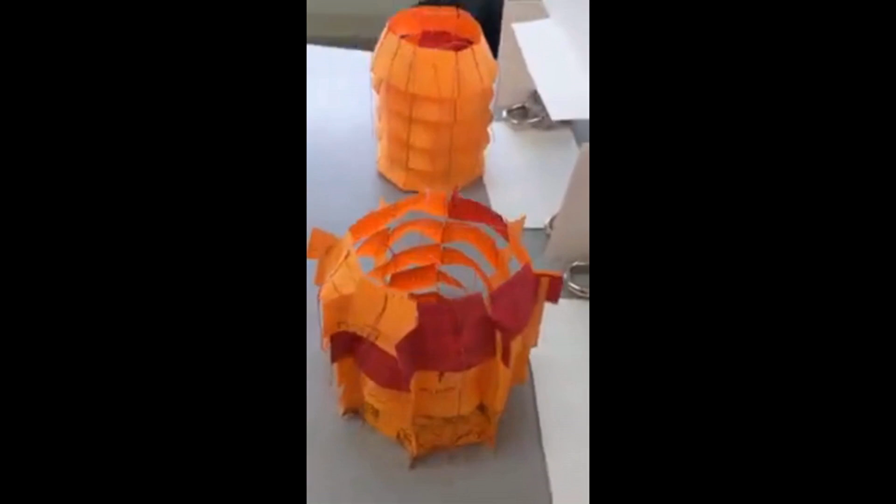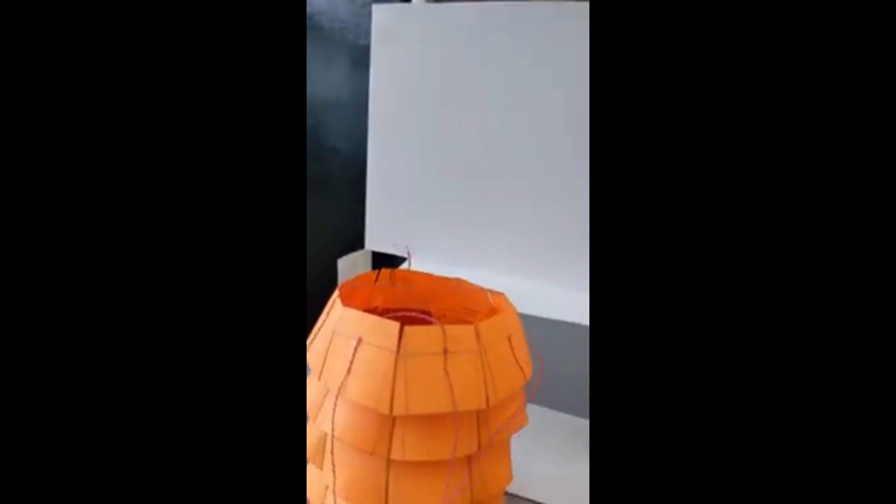Now, I don't know if you remember this, it was the Darwin wind turbine, and I made that out of wood with flapped vents, and to be honest, it rattled worse than a skeleton in a hurricane on the Day of the Dead. You weren't going to get much sleep with that thing banging around on your roof. A friend of mine, Max Kennedy, thought exactly the same thing, and he had a look at it thinking, can we do a flapless version? And he made some models in paper. With those paper models, he was able to show that this thing actually worked, blowing the air up through the central vent and not disturbing the string at the back with the wind flow going over it. And that was really awesome.

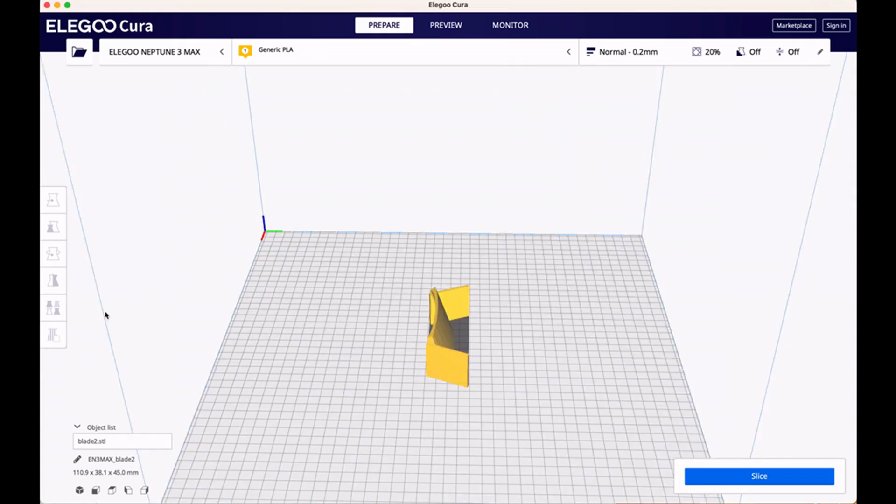I've gone through Tinkercad, so I jumped over to Tinkercad and designed an STL file to test the blade, and this is the design of the blade. Now what we're doing is we're printing it, printing out individual blades. They're 5 centimeters by 2 centimeters, so we can see the idea actually works by putting it together. Once we do that, we can put them together in the actual program to create a rack of them, and see if we've got a nice rack or not. But anyway, let's get them printed.

So there's my tiny example printed, and if I put 8 of them together, then I can check the angle of them, and yep, they make a complete enclosure. Now it's an octagon, so that internal angle is 135 degrees.

Now, Max tells me that if it has baffles on the outside, the support structure on the outside, it operates better. He did both, and if you watch the video, you'll see the result of that. So he did both, and I've put the baffles on the outside, so the wind hits the baffle, and then it's forced up. Obviously, this is what a single ring is like.

To make a multiple ring, what I've also done with these ones is to check that they, in fact, slot on top of each other, because that would be annoying. And they do slot rather nicely on top of each other to make a stack. So having checked that, we now can have a bit more confidence that we can put these together in a rack and print a rack out.

To see how I made that, we're in Tinkercad, we've got the work plane, and I always put the ruler on, because if you put the ruler on, you can tell where you are and what you're doing. Stick it on, use midpoint, there we go.

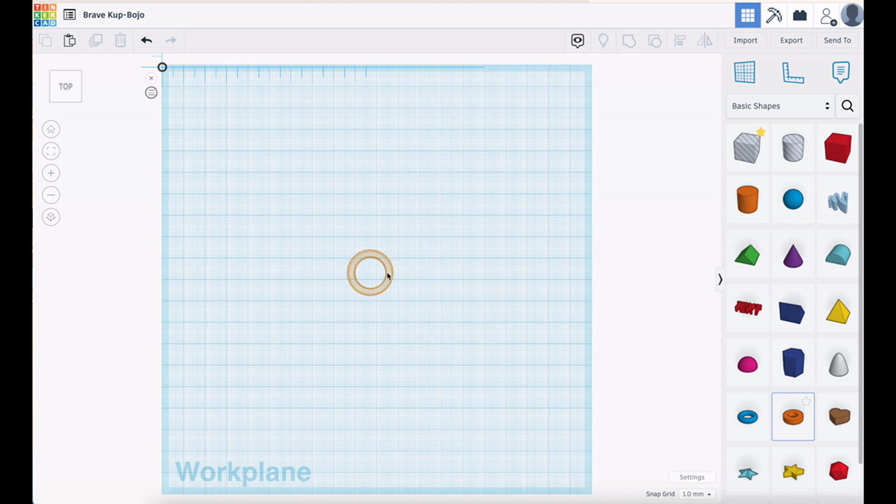Now this is a whole group of primitives you get. You get other ones if you click down on basic shapes, so these primitives are all I actually used. Start with the tube, put the tube somewhere on there. If you've got the ruler on, all of this stuff will show up, which is brilliant because it means that we can change sizes simply by clicking on there and typing in our new size. We can move it with the arrows like that, or we can move it just by clicking on there and typing in the position that we want it to be. There we go, it's in the center.

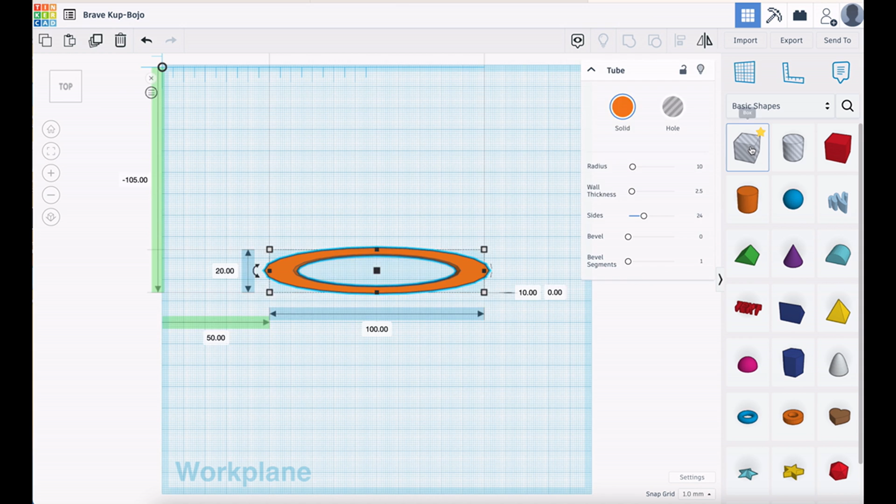Now we want this, which is more or less an erase tool. If we click on that box and add that box, we can drag the handles to change the size, or we can highlight those and change that. And equally we can change the position. Remember, we used midpoint, so if we click on that midpoint, it was -105. We click on that midpoint, it'll be that midpoint there, which is 10 from there. So 105 would be 95. And that puts it in the midpoint of there.

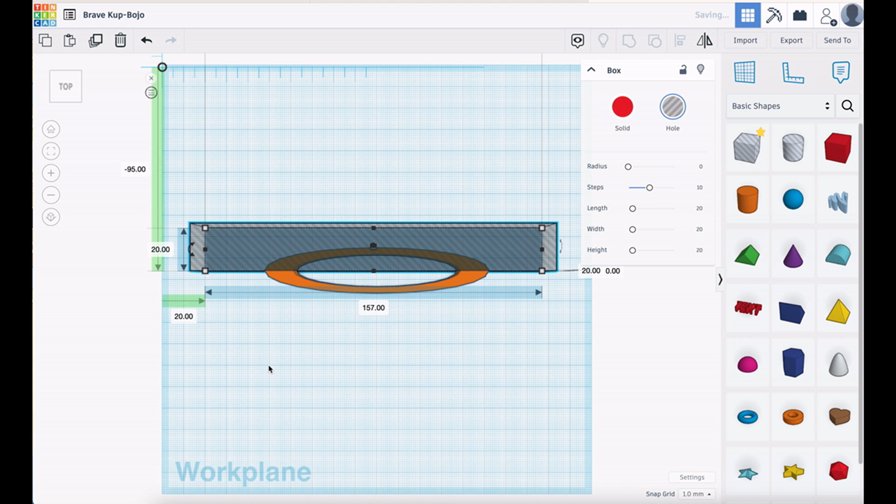Now if we click out there, highlight the whole lot, and group the shapes, we get only that shape left. It's only 10 millimeters high, which is a bit short, so let's make it 60 millimeters high. There we go, we've now got it 60 millimeters high.

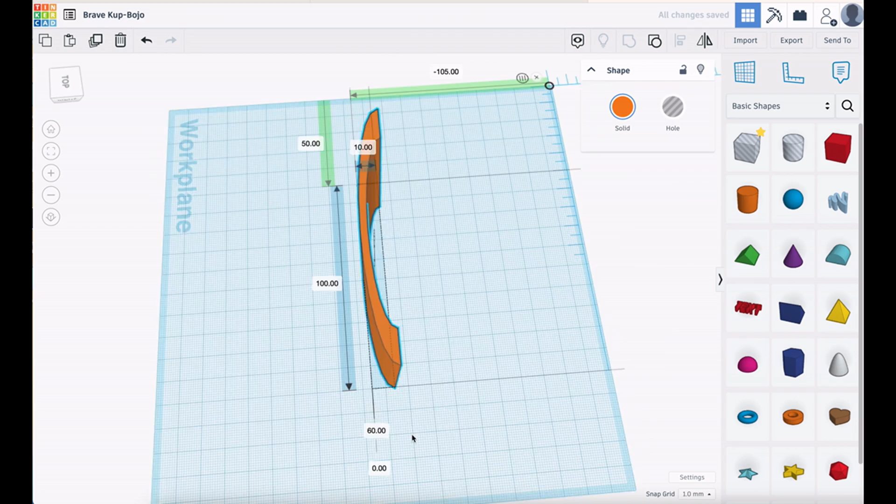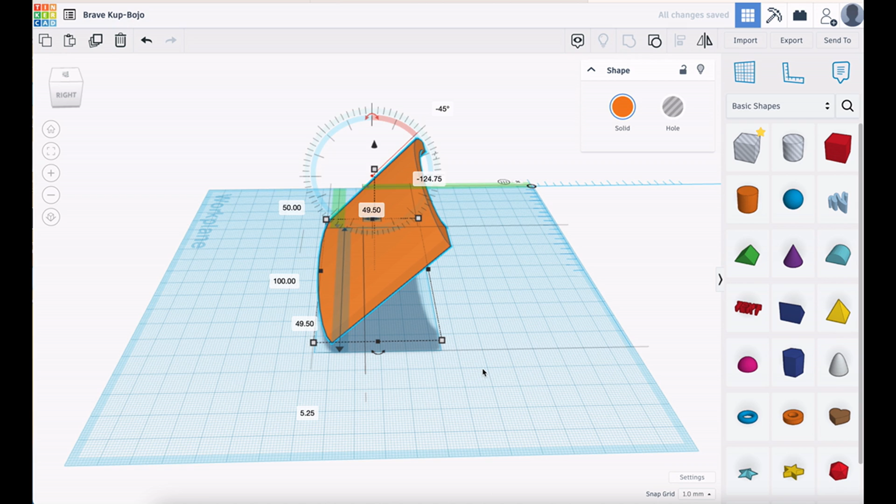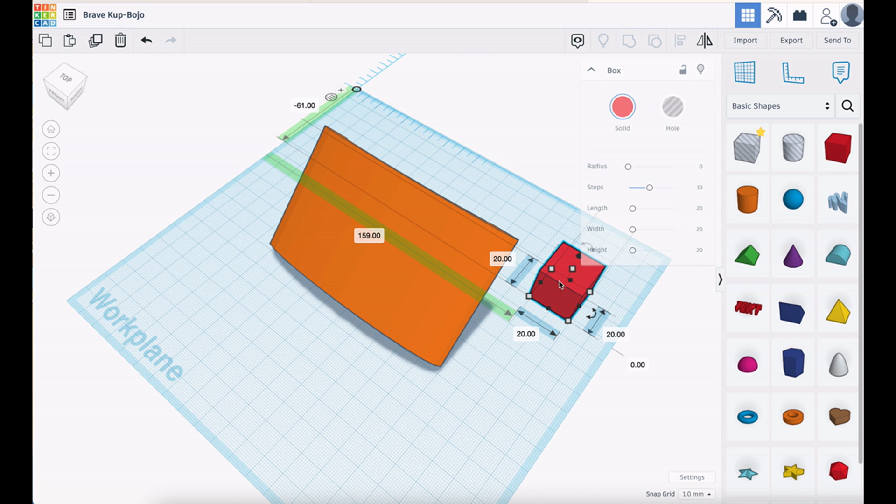Now, of course, we want the side bits to it. And for the side bits, we can use this, put the block on there. If we're wondering how big that is, remember all you actually have to do is that, and it tells you it's 49.5 high. We want to leave a little bit at the top, so let's make this 50. So in its height, which is that one there, we'll make that 50. Its width, we only want about 3 millimeters, and its length here, we want about 40. And that gives us a side pane.

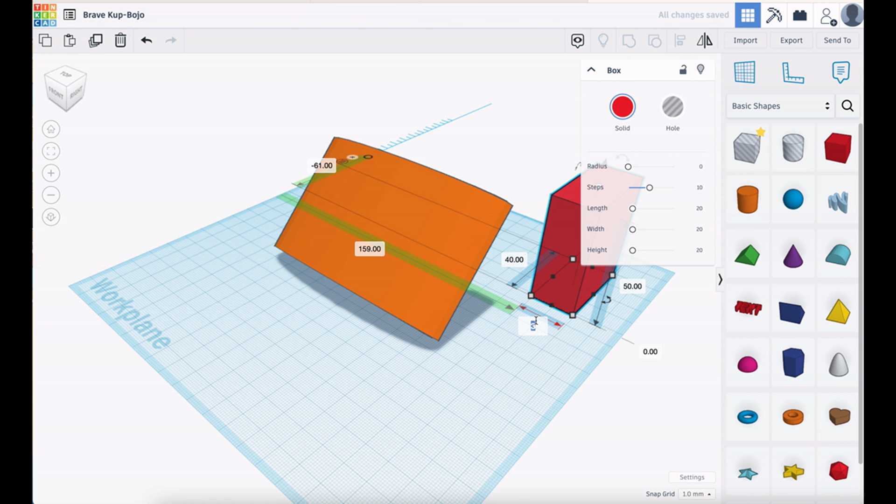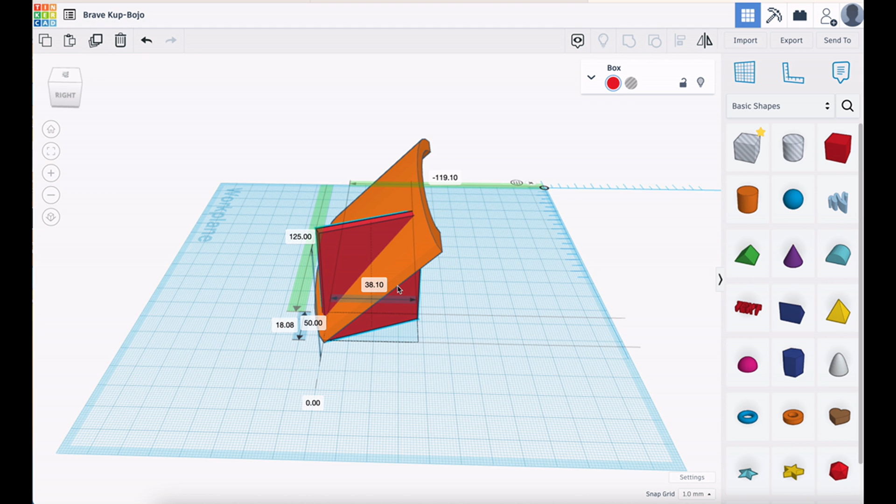If we click on that side pane now, we'll again get the rotate, there it is, and we can rotate that 22.5 degrees that way. That will give us an octagon when it comes time to do the actual octagon. Click on top of the top view.

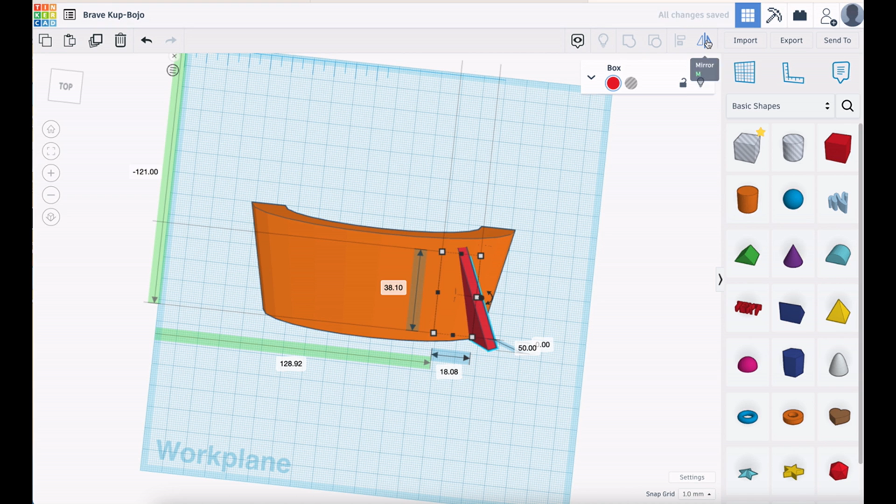That's looking pretty. If we click on that and replicate it by clicking the replicate button, or Control D, it will replicate it. It's the live one. If we click mirror, it'll ask which way we want to mirror it. We want to mirror it that way, and we get a duplicate mirrored at the other side.

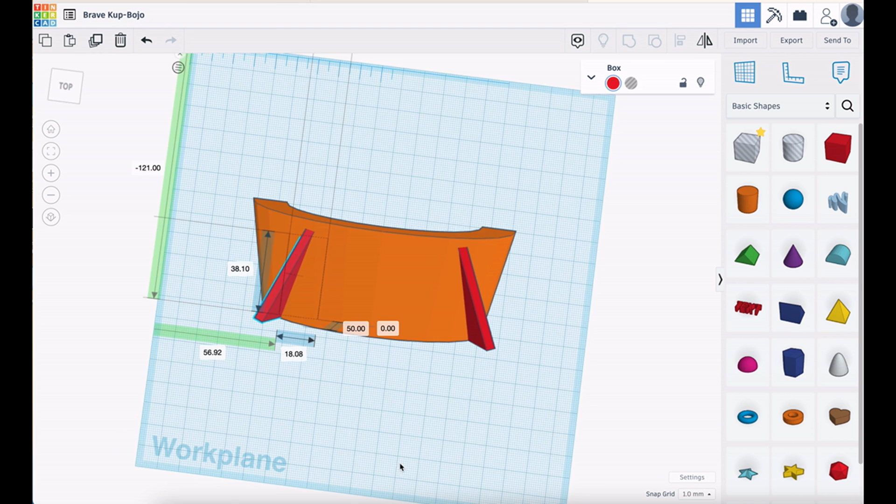At 22.5 degrees, we can slide that along until we get it into that position. We're getting very close to what we actually want. All we need to do now is get rid of some of these bits and pieces, and to get rid of things we use this.

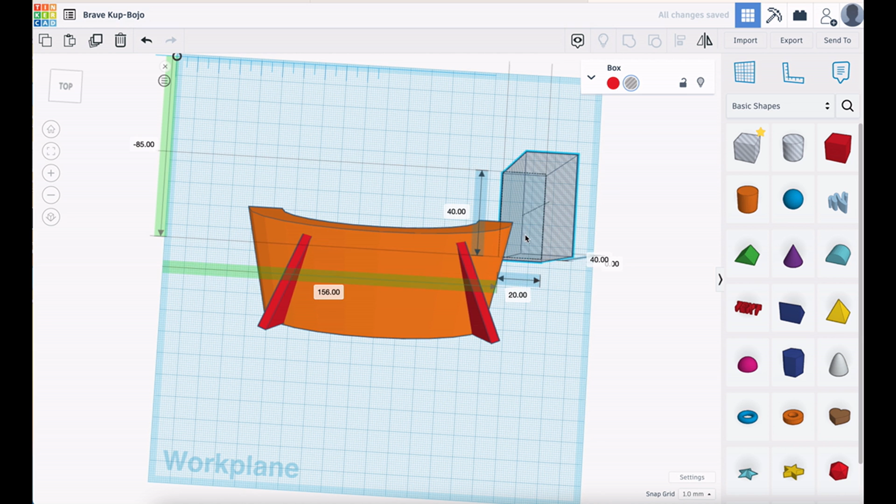So we can stick a box on there, and again we can increase that to 40, which is the one we had before, 40, and then we can increase that to 40. If we move that down, it will cut off this. Of course, we want to angle it again.

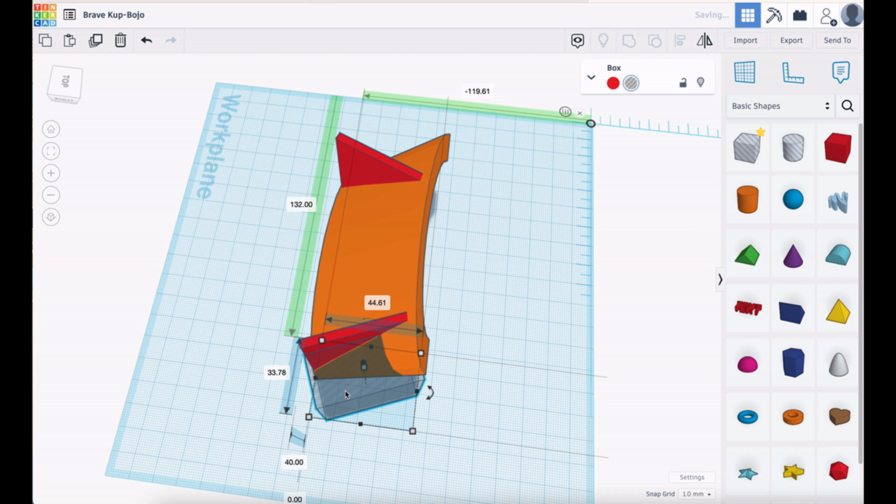We want to angle it the same way that we did that, at 22.5, and then we can move that in there. Check it's in the right position. It's obviously too short, so let's increase that to 50. There we go.

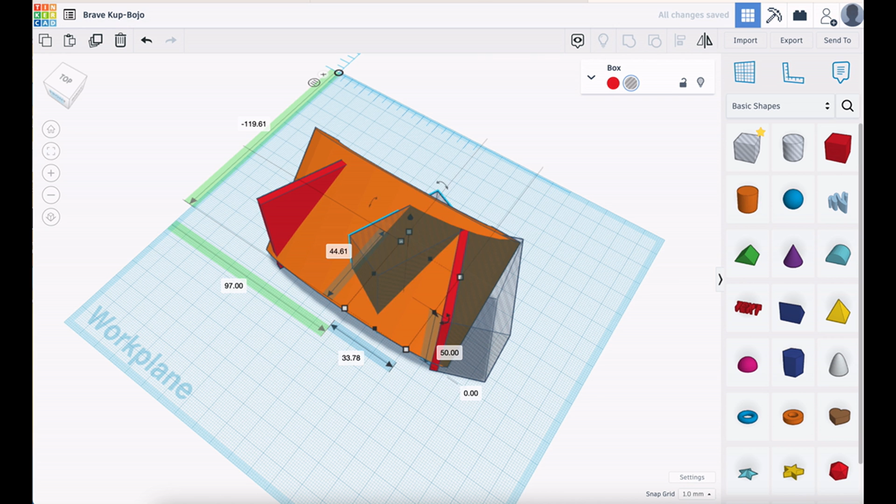Then we can duplicate that and mirror it, and this time again we want to mirror it that way and slide that one over there. Check it's in the right position.

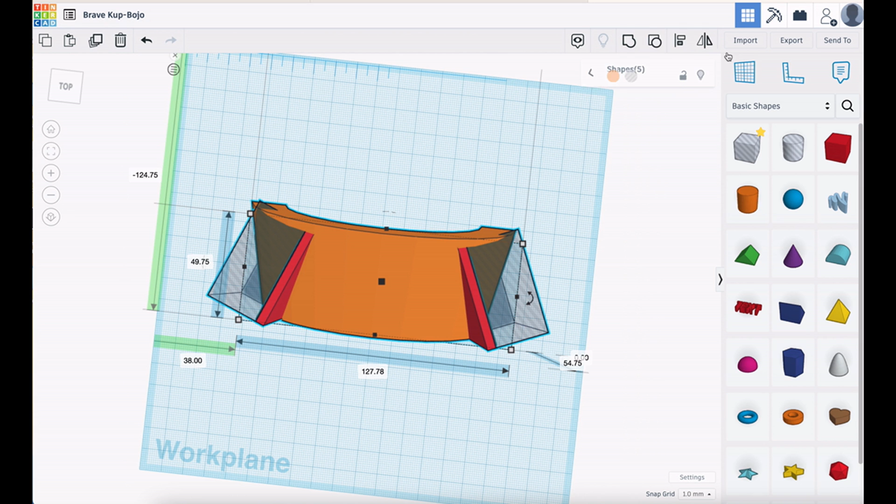Okay, but now we can click off the workspace, highlight it, group it, and it will rid us of all of that. Now we've got these extra little bits that we don't particularly want, so we can get another box.

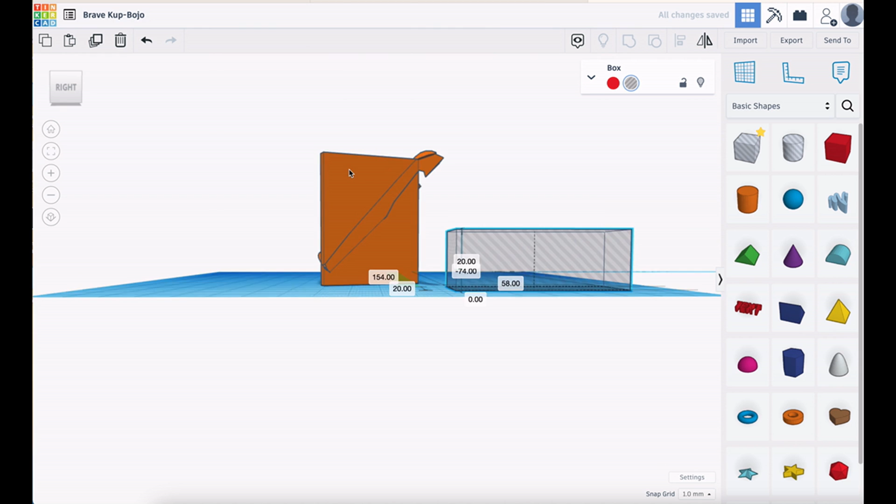We can make it whatever size we want. You'll see, however, it is on the ground floor, so to speak, and we want it to be 50 up because we want it on the top of here. You can see it's saying there it's on the ground floor right there. Let's type 50, and lo and behold it jumps up to the right height we want it at, and then we can drag it over there.

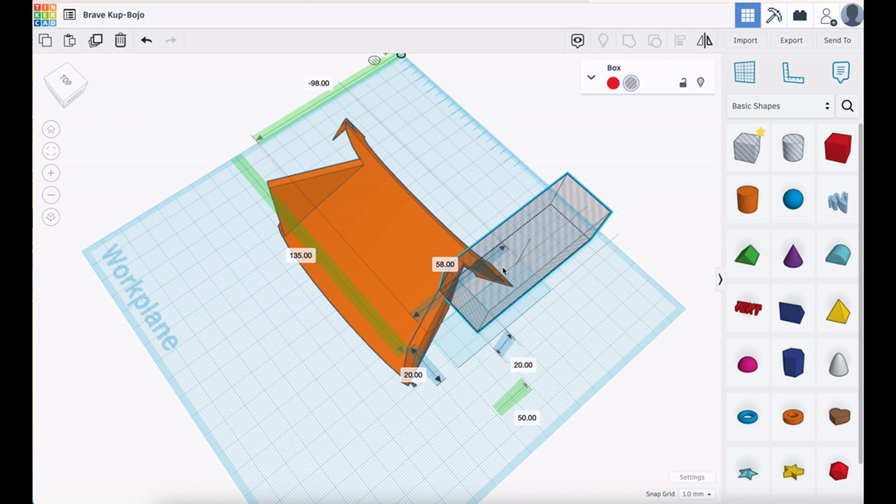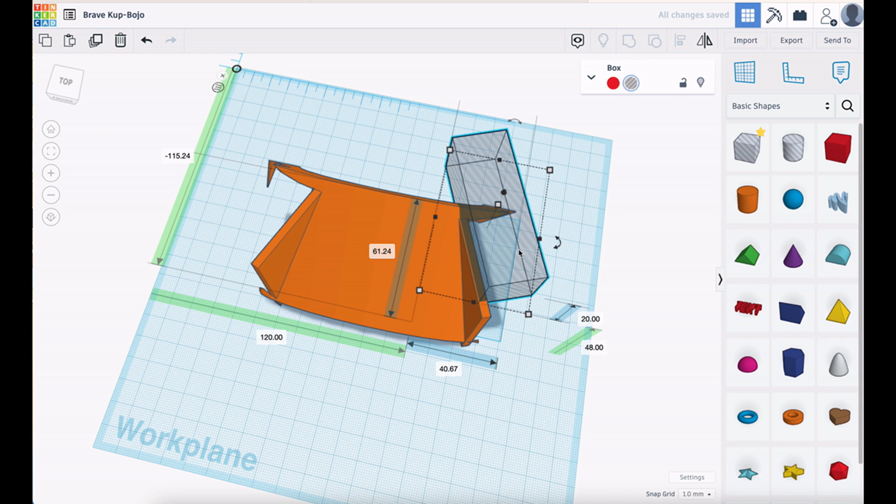Angle it, and move it in position. You can also move it by pressing the arrows. Fantastic.

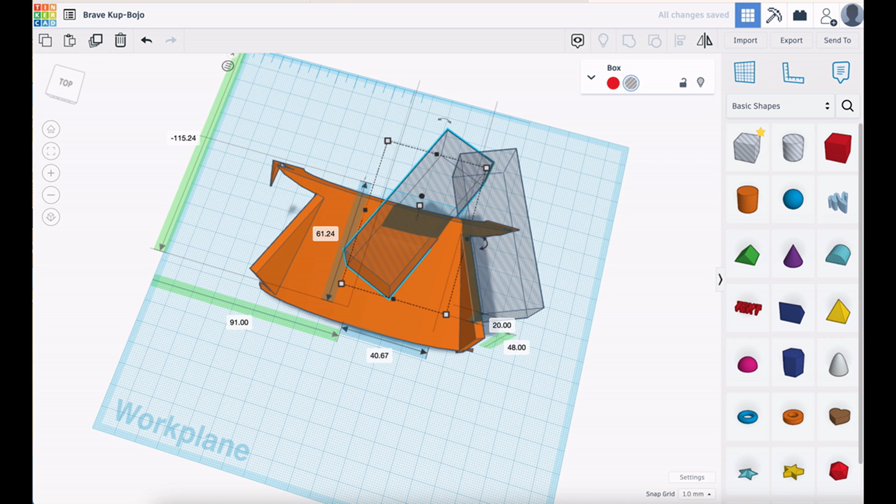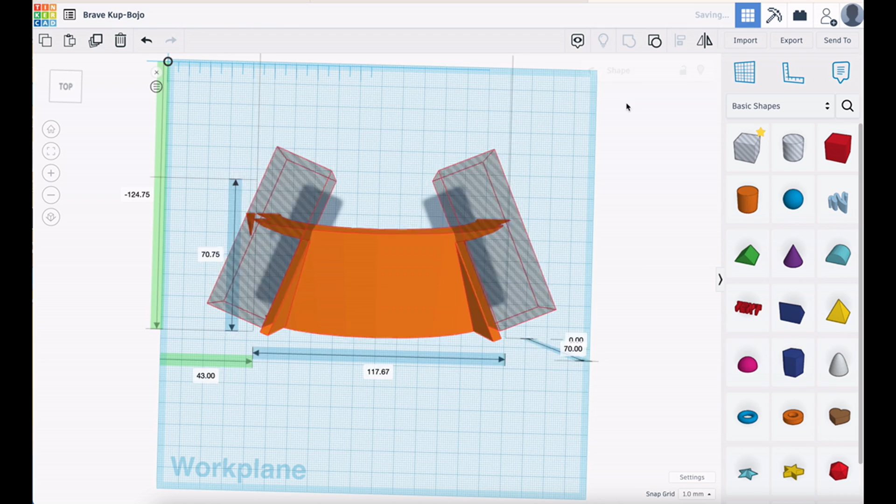And again, if we duplicate that and mirror it and then put it over that, we can go off, highlight and group. We're left with these extra little wing bits that we made an error with, but we can do exactly the same thing to remove those.

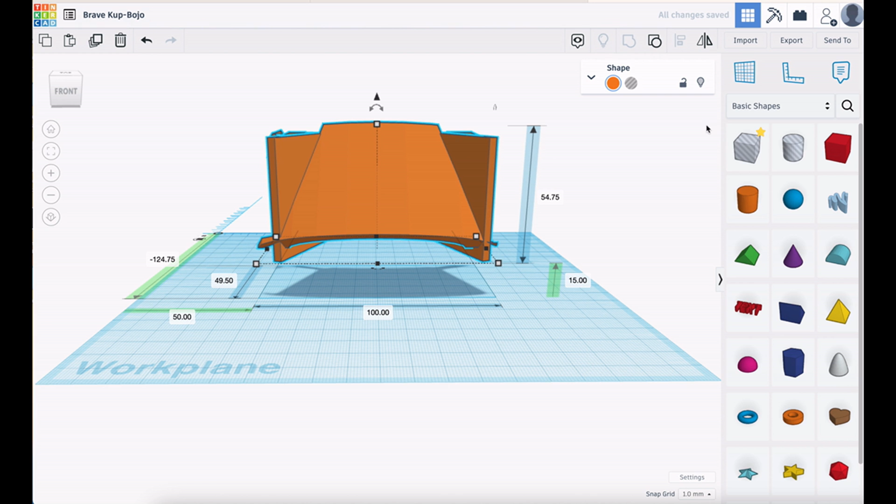The only other thing we really need to do is to tidy up this bottom section here. For that, again, we can see where it is. It's at 0. Let's move it up by 15. Get another one of these boxes. Stretch it out so it covers the entire bottom of it.

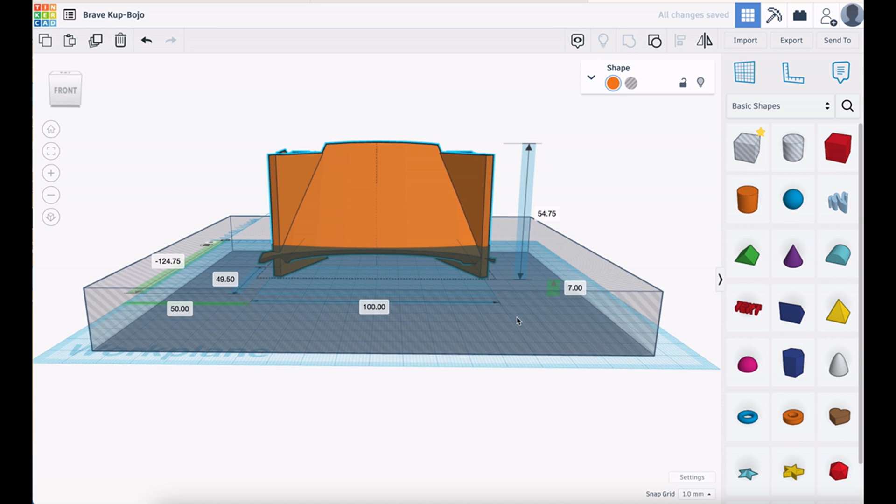And then if we look at that and click on it, remember it was 15, we can lower it. There we go, now it's all cut off there. Let's raise that up a bit. There we go. And again we go out and group.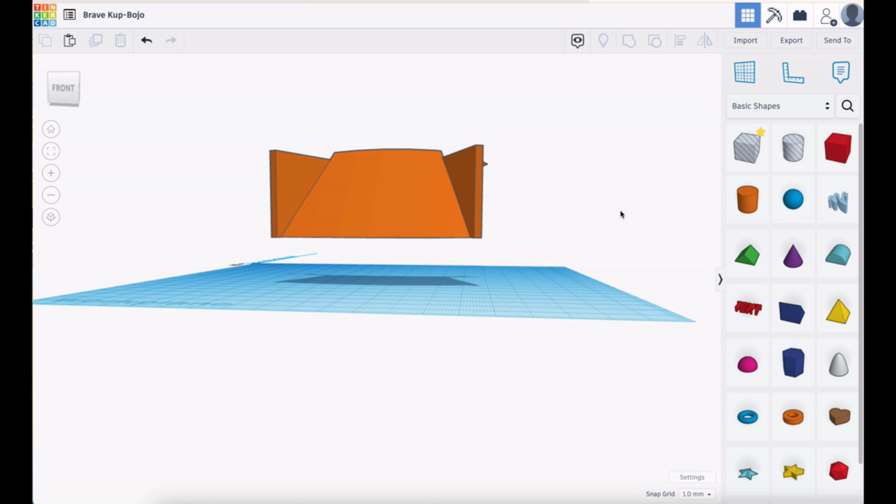Flashes red for a minute, and we get it there. Now we do that, we can see that's at 20, so let's drop that onto the bed by changing that to 0. And it's dropped on the bed.

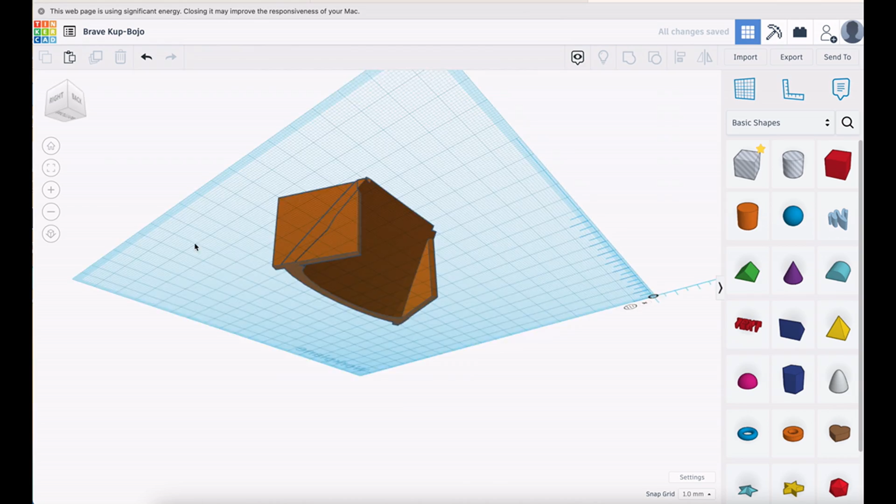And there we go, that is my basic shape, more or less. I'll just tidy these two little wings up that I left there by mistake. Okay, and that is how I made my basic shape from the primitives available in Tinkercad.

Then all we have to do is export it. When it's exported, it's fixed, and we can re-import it, and then we can just duplicate, duplicate, duplicate. So there's a single stack of 3, and it's done just by stacking those up in the drawing program, exporting it, slicing it in Cura, and then printing it.

And if I blow here, it does indeed direct the air upwards, which is really cool.

So the next thing's obvious: print 8 of these and stick a DC motor on and test it, and maybe dangle some bits of red string to make sure that octagon shape also works. But this works to direct the air coming here upwards, and we've seen previously that it won't come out of the back, so this should be a really good update on the Darwin wind turbine.

But it's also something else - it shows you what can be done with the simplest tools. Tinkercad is something you're going to get hold of in about half an hour, and although it is a cut down and simplified version, you can do some great things with it, and it's going to get you up and printing and having fun and making things, which is what it's all about.

3D printing isn't about 3D printing, it's about making stuff. And that's why I like it, because it's all about making stuff.